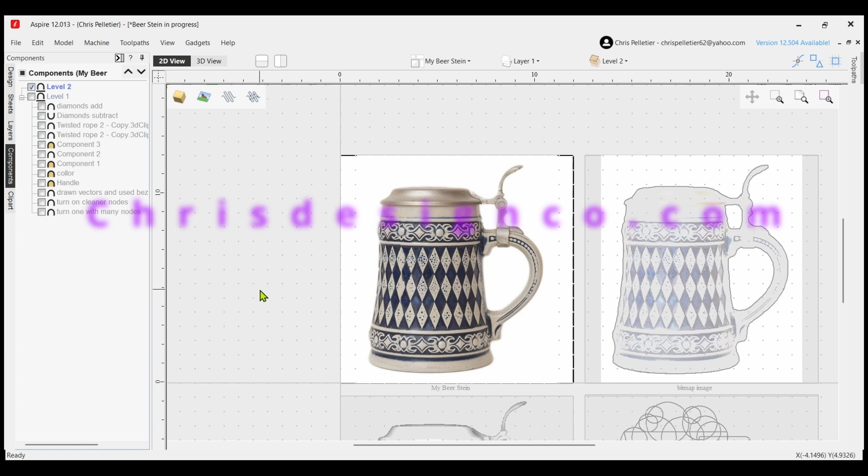I'm going to do another tutorial model, showing a couple different ways of making a model. So if you have a program that can take bitmaps and make good depth maps out of them, you can do this. You can go to Copilot, get AI maps, or go to a couple different free sites to get depth maps made out of your bitmaps.

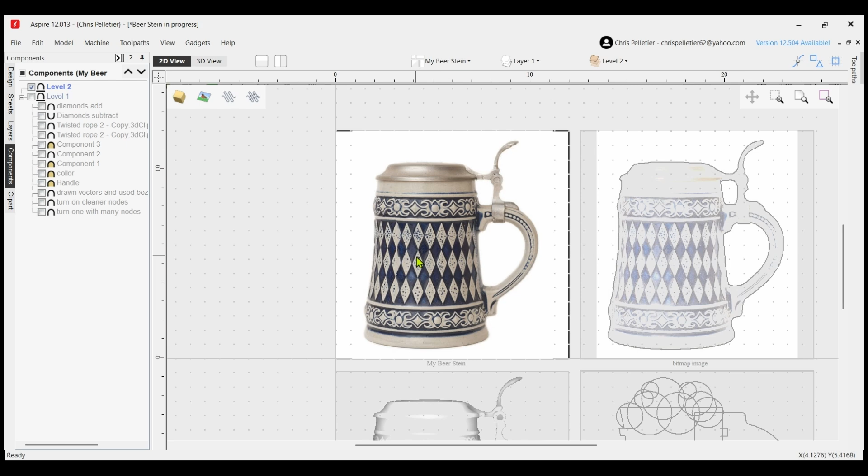So here's what I do. You take the image, I just got this off the internet, and what I'm going to do is a trace bitmap of this. So I'm going to go into trace bitmap, and I'm going to outline this whole thing.

I'm going to accept it and close, and turn the bitmap off. Now you can see you've got this vector. So I'm just going to get rid of some of this mess here.

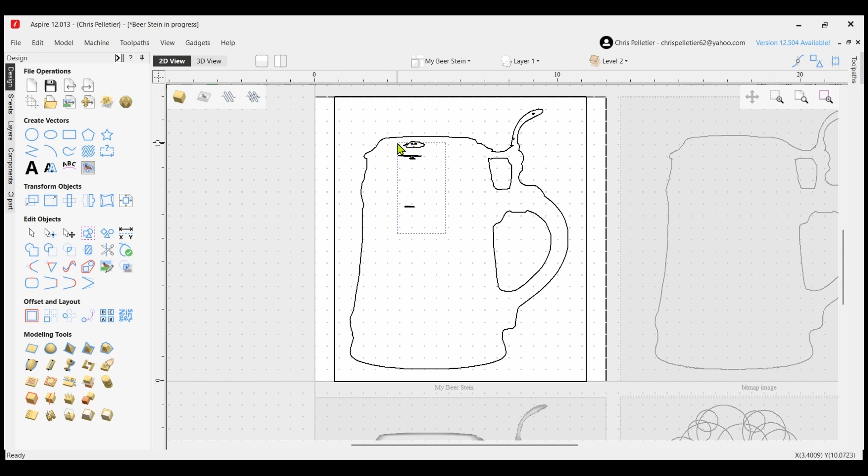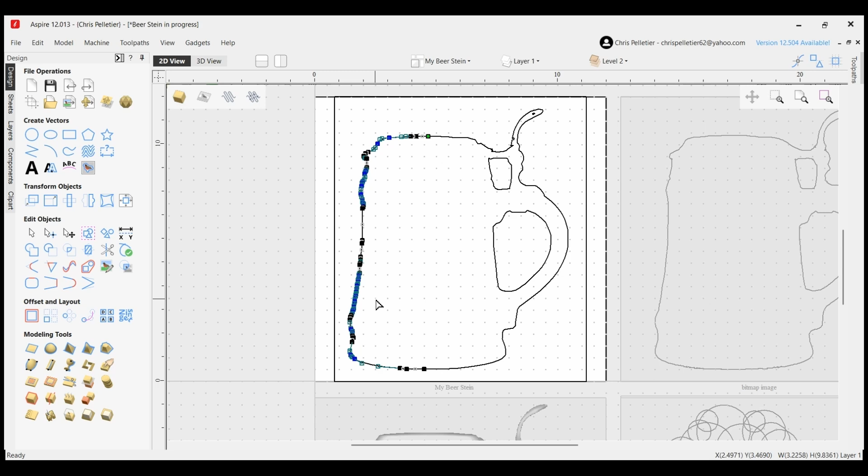Now what I'm going to do is a turn. So I'm going to go into node mode, and I'm going to cut this in half, because I don't want this part, I just want the body of the mug. So which means you're going to use this here. Now if you notice, there's lots of nodes here, lots of them.

Now I'm going to show you what happens when you don't really clean up nodes. So if you go in here and do a turn, you go into your spin and turn tool, take turn, make it merge, and apply it. And I scaled it to a height of 1 inch.

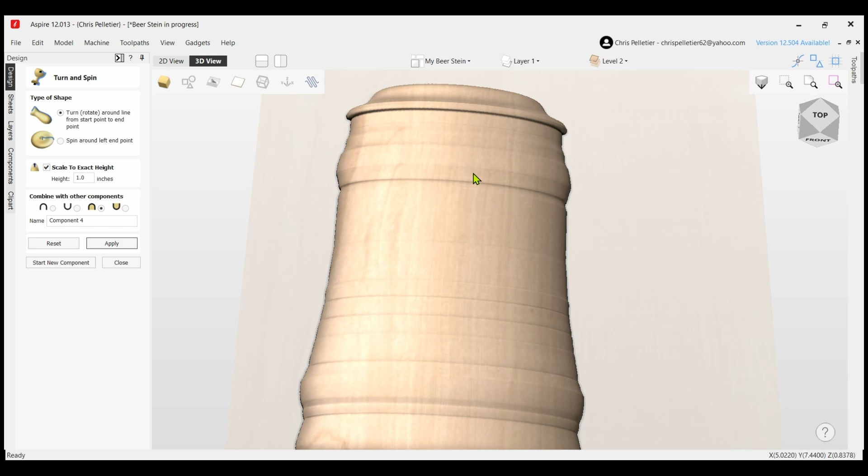So here's what we're going to see. I'm going to turn that off. Now if you look at it, it looks okay, but see all these lines in here, all these extra lines. I did not want this texture. It doesn't look, to me, it doesn't look real.

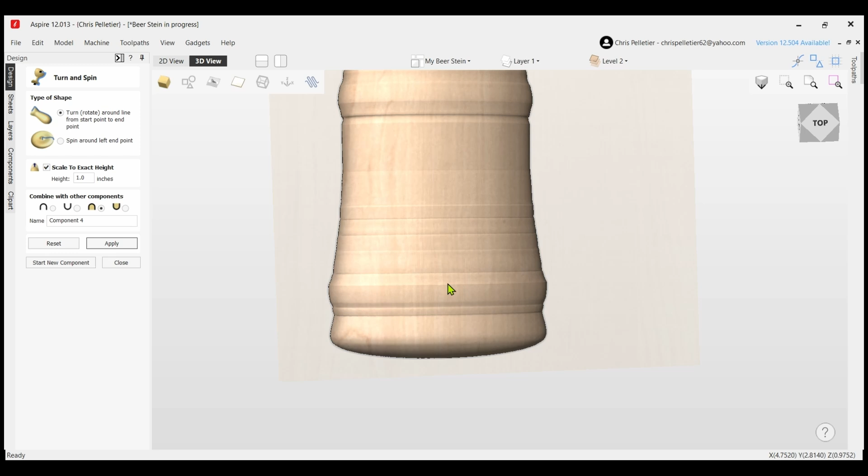And you also have this bottom of the lid of the stein, which is rounded. If you were to have a mug with a round bottom, you'd need a reason to drink - you'd just keep spilling your beer. So this isn't very accurate either.

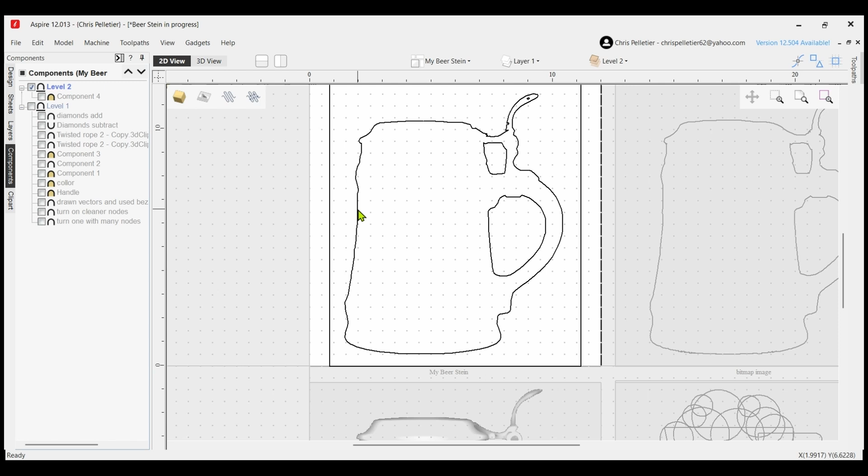So what I do is I don't do that. Even if you go into this and try to do smoothing with it, let's see what happens when I smoothen those nodes out. All right, better, not bad. So let's try that one.

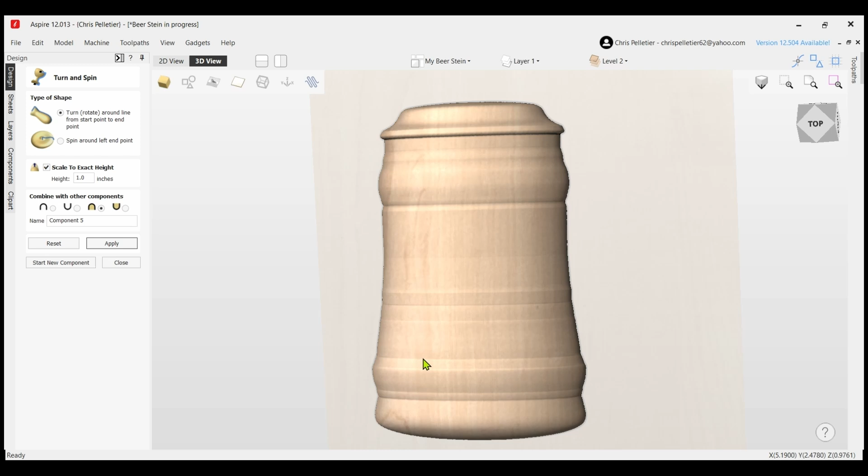Still get all this extra stuff, which is not clean. It doesn't look good to me. So we're not going to use that.

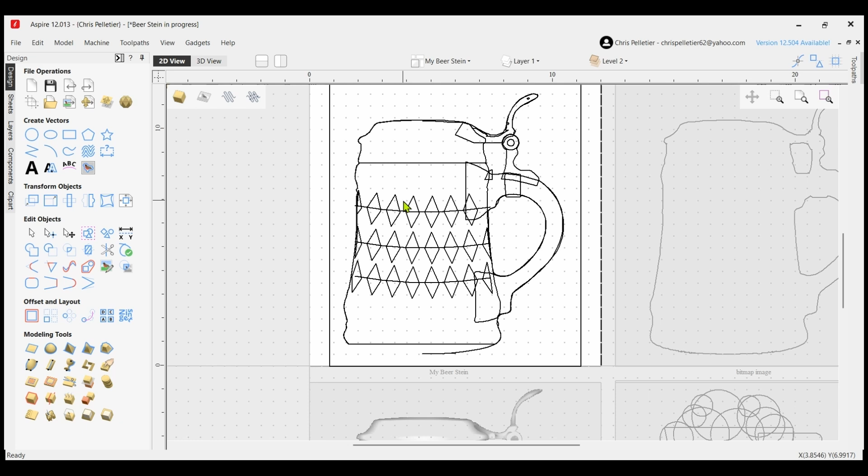So what I did is I removed this and drew my own vectors. I drew diamonds, which was on the model. When I drew the model, I drew a diamond, and then I took this tool here, which is create an arc, and I just followed those diamonds so it would kind of look like it's rounded. If it's straight, then it's going to look straight, and it doesn't look like it's turning. So that's what I do.

So I put 3 of them in here, and then I did array. I selected the diamonds, highlighted your vector, and went into copy along vectors. I did 8, align to curve, and create copies on a new layer. When I did that, it made all of these. I'm not going to do that now because I've already got them.

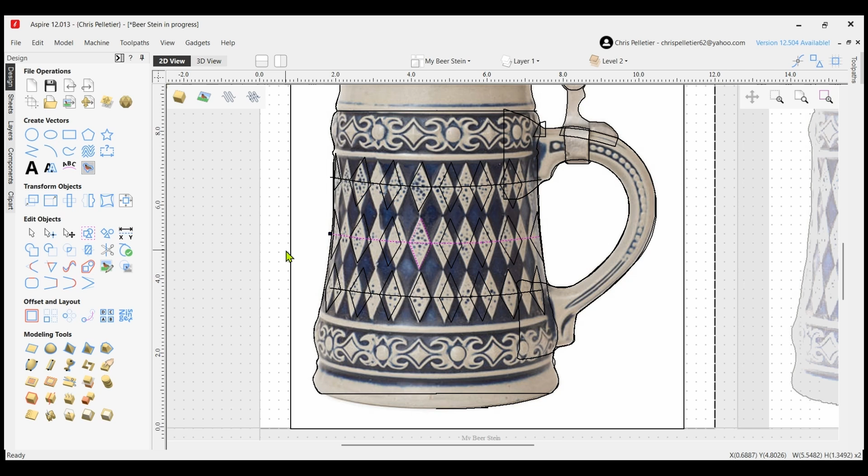So the other thing that I've done is I drew my own line. As you can see now, I made it straight rather than going around. And if you look at the nodes, I'm going to clean them up. Now, how many nodes do I have here? Got very, very few nodes. Very few.

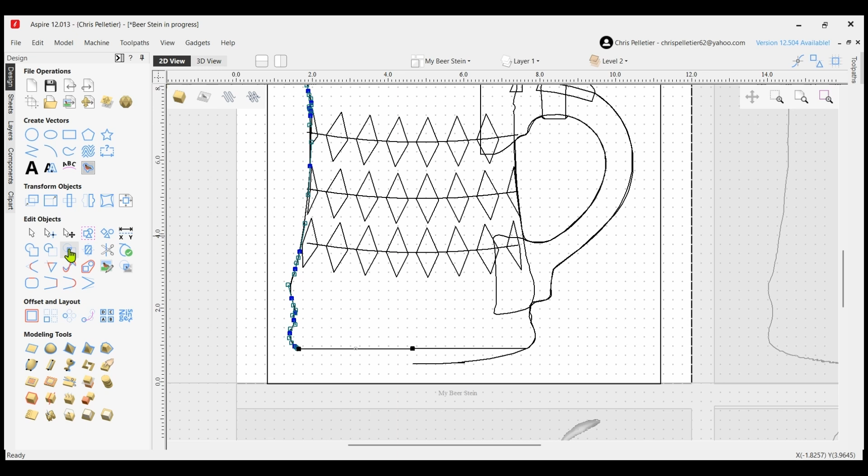Just so you can see them, here are the nodes now - a very small amount. So now I'm going to take that and do a turn. Now look at that, nice and clean.

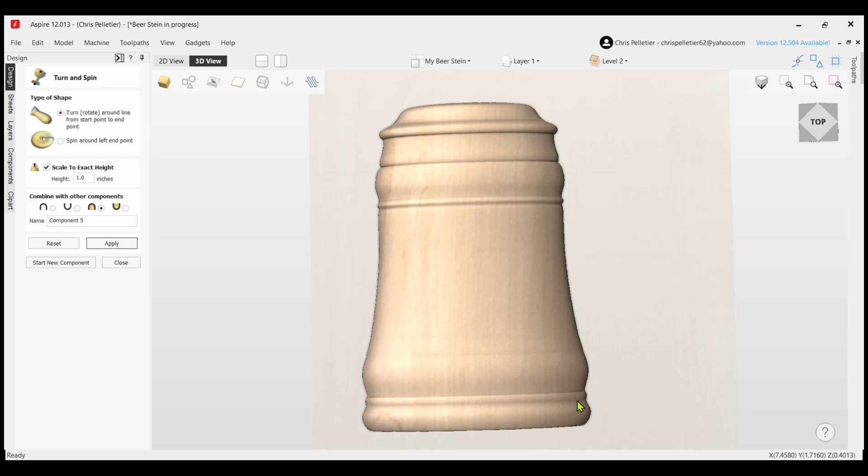I get the bevel that I wanted here. I get this little piece here, which looks like a bottom, nice and round, and if you notice, it's flat. Well, at least you can drink a couple more beers without spilling because it'll sit nice. You've got the top - this is starting to look like a beer stein. So we're good with that.

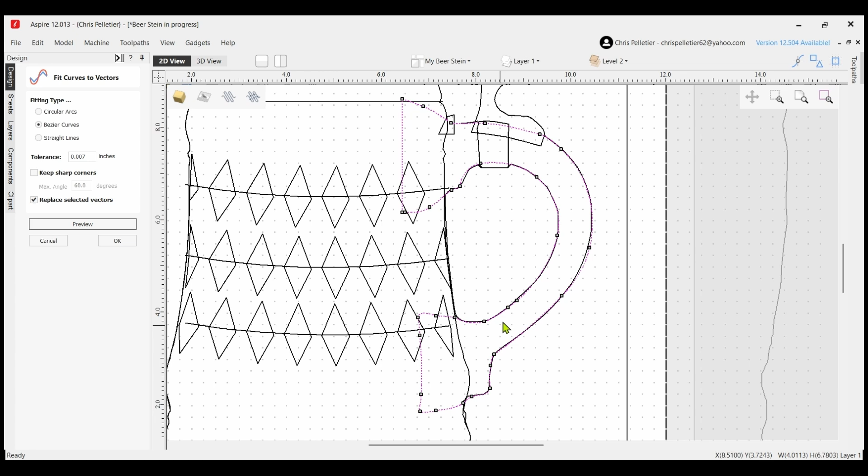So then what we need to do, I'm going to turn this off, go back to my 2D vectors, and now I built a handle. Again, I did the same thing - I built my own vectors, because if you go in and take a look at the nodes, they're nice and clean. Very few nodes.

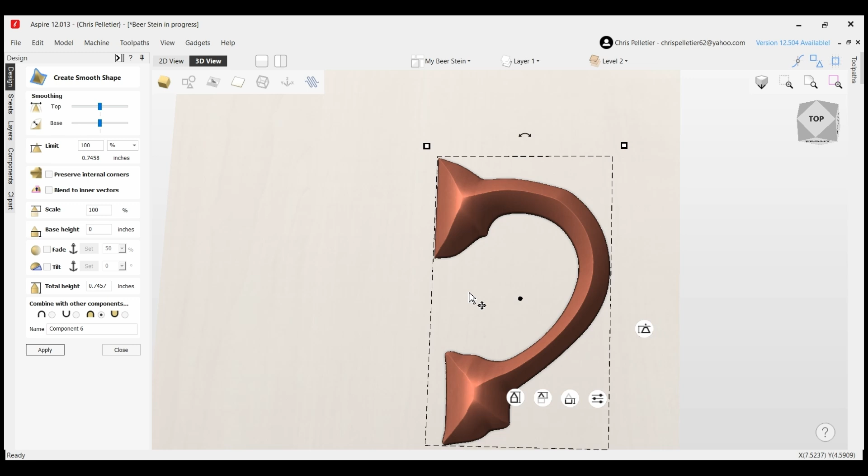So that's going to make a good model, a component. So what I did is I took that and used the create smooth shape components, and again I'm going to do a merge and it creates it. So now what I can do is you see it - I'm just going to shape it, flatten it out a bit, and make it look like it's a handle.

That way it's got a nice little angle. It looks pretty real to me. So that's good, so we're going to take that.

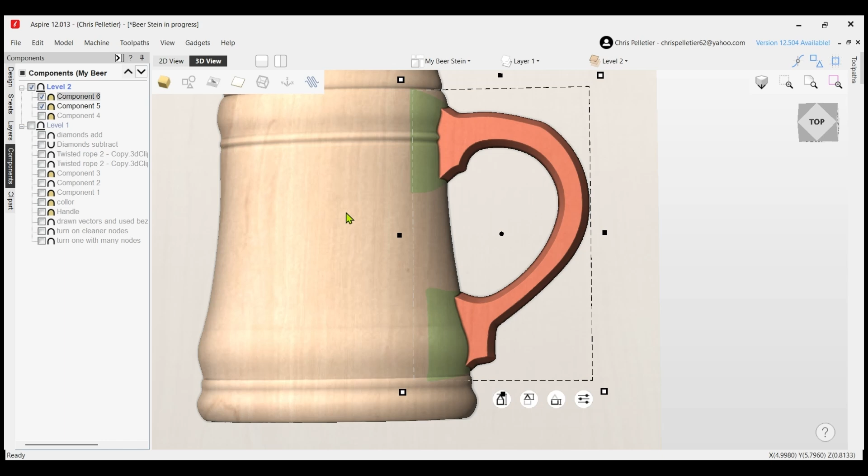So if I were to do that and then turn on the mug, here they are. Now remember, I put them both on merge, so now they're fitting nice and neat.

I'm just going to bring this up a little bit to make it look a little better, just a little bit. You can play it any way you want.

And here's your beer stein coming together nicely. Now you can design your model any way you want. Now I'm also going to take this, hold the Alt key down, and slide it in a little bit, and up.

So I like that right there. So now we have to make this latch system and everything.

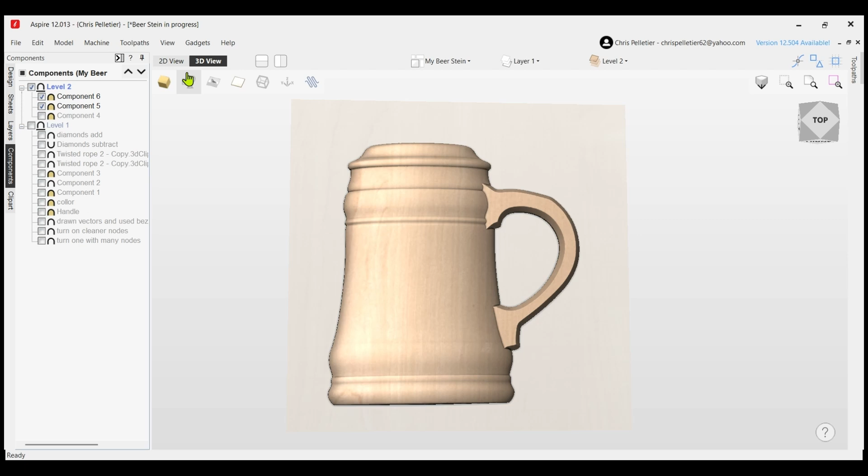So what we do with that is we're going to go back to our 2D view. I'm going to turn this off. Now I drew some latch pieces, and again, I drew my own vectors so they're nice and clean.

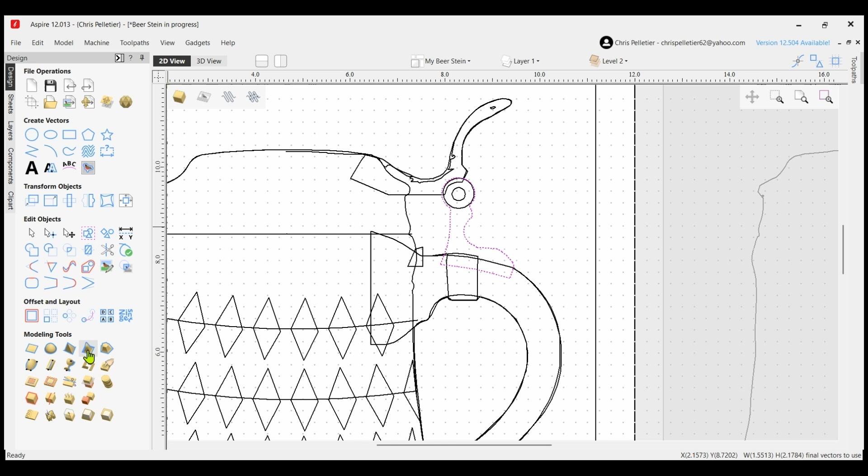So what I do here is I make this one, using the same tool, create smooth shape component. Also going to use merge, create that. Go to my 3D view, and I'm going to flatten it out a bit. Okay, that looks good for now.

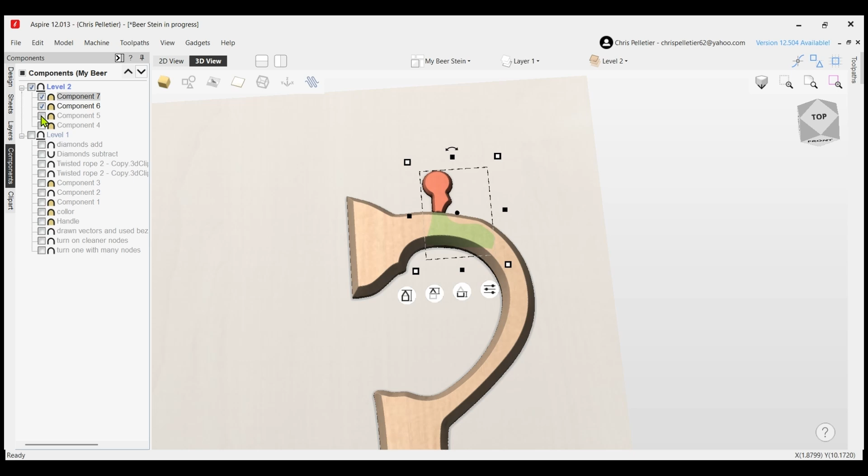Let's turn on my mug, or my handle, and my mug. So since I moved things around, it's not going to sit right, but all I need to do...

Is get it in there, have it sit there, bring it up a little bit.

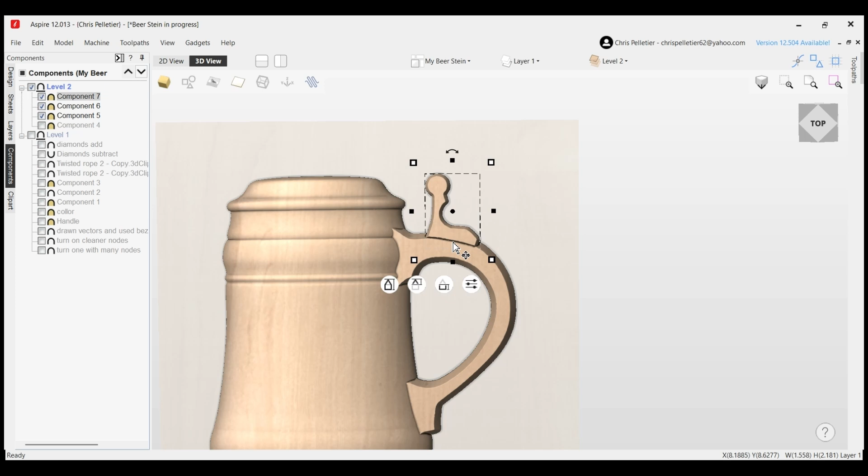I'm going to bring it down. I don't want it all the way into it, so we're going to keep it like right here.

Okay, so now we have that part. Now we have to do the circle, it's a little nut of some sort, so we're going to draw that.

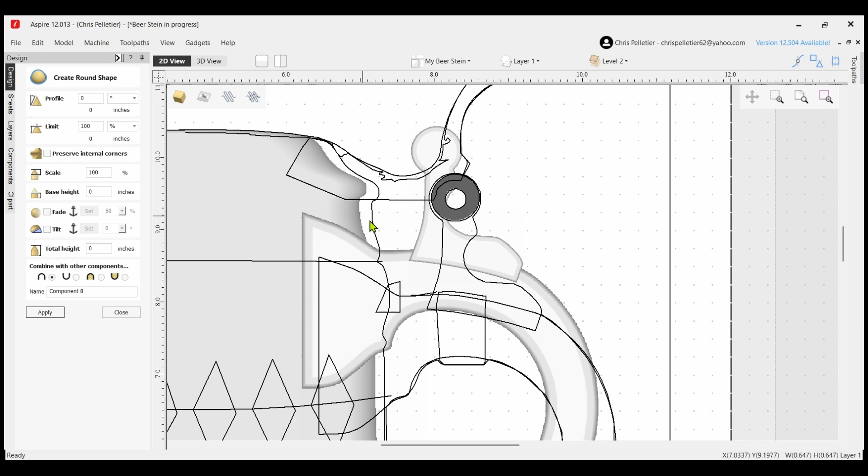And what I'll do is I'll use the round one, make it round looking. Now this one we can do add because it's going to sit on top. So come here, and I'm going to bring it up to about 90 here. I'm going to flatten her out just a little bit, give it a little bit of flatness.

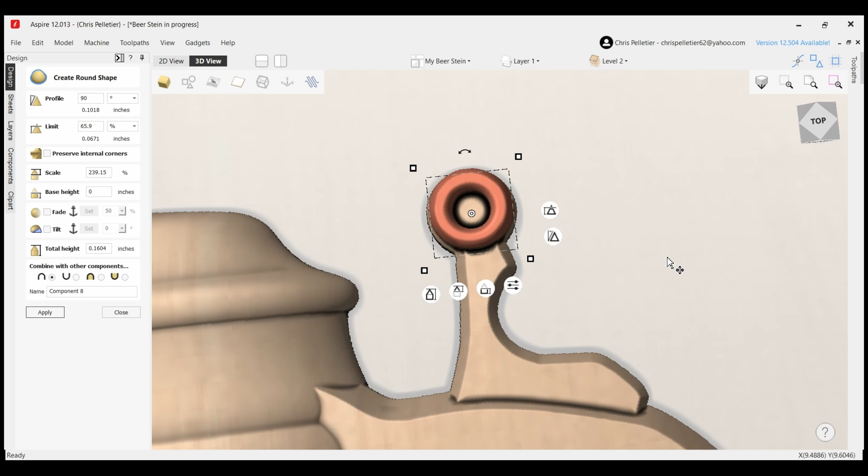And I'm going to bring it up, and now I'm going to get it and sit it right on top there. So now I've got this little knob here, which looks good.

Looks like the hinge. Now what we need to do is go make this piece here. And I'm going to do the same thing, but this is going to be merge.

But I'm not going to use circle, I'm going to use this piece right here, and we're going to use merge, select the vector, create.

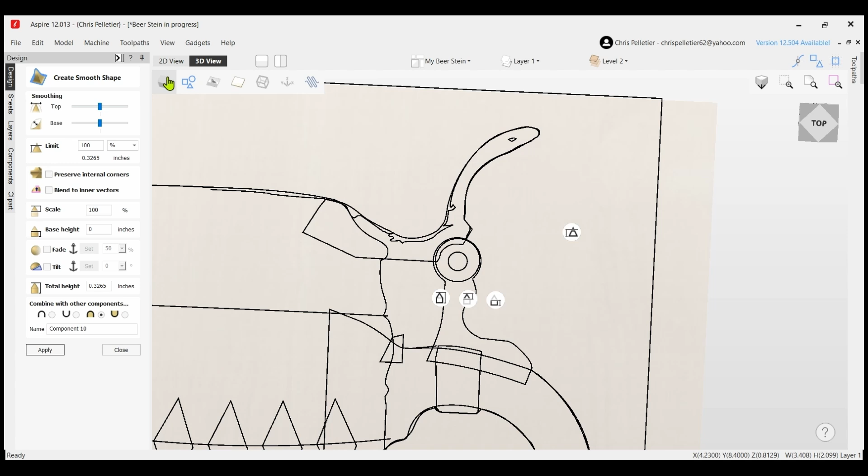Turn it back on, turn this off. I'm just going to bring it up for now so I can see it, and I'm going to move it.

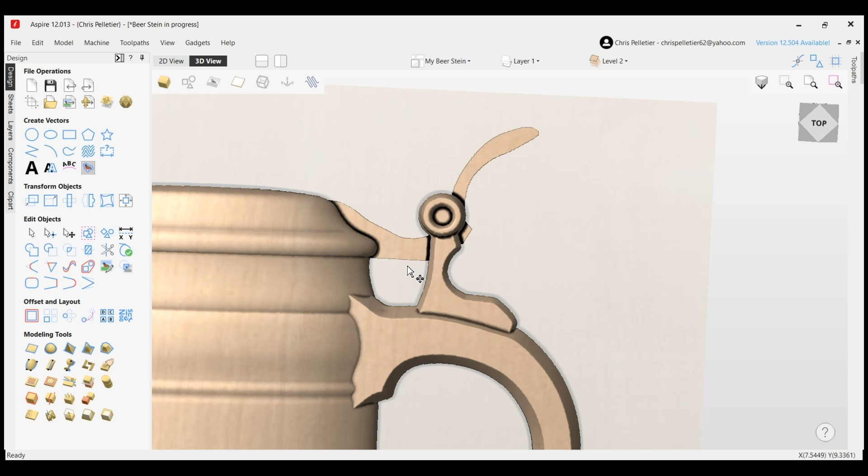I don't know what happened here. What happened? Let's delete that. Delete that. Start over again, and we'll build a new one.

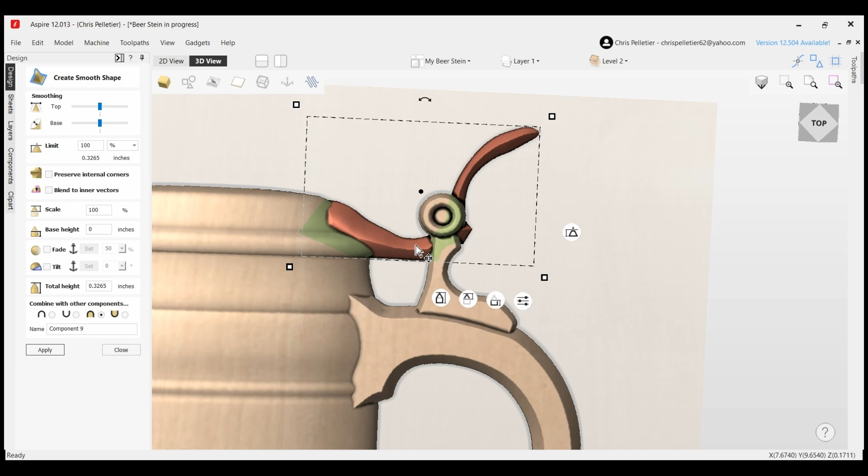Okay, so this sits kind of on top of that. We need to flatten her out. There we go, now we can just bring it up a little bit more.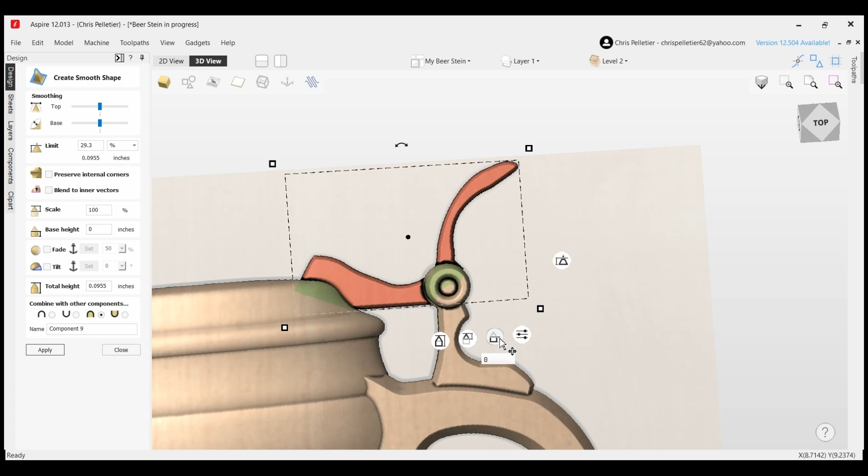And now you can see it looks like a nice latch piece, so there's a nice clean model, and that's how I build it.

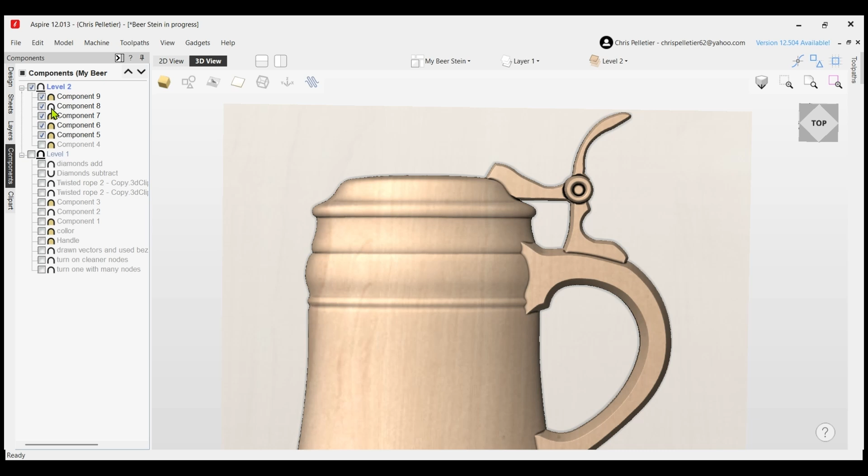So I'm going to show you what mine looks like after I spent a little time on it. So I added this piece here, I added these, and I added a little twist, which I will do another video on how you do twisting.

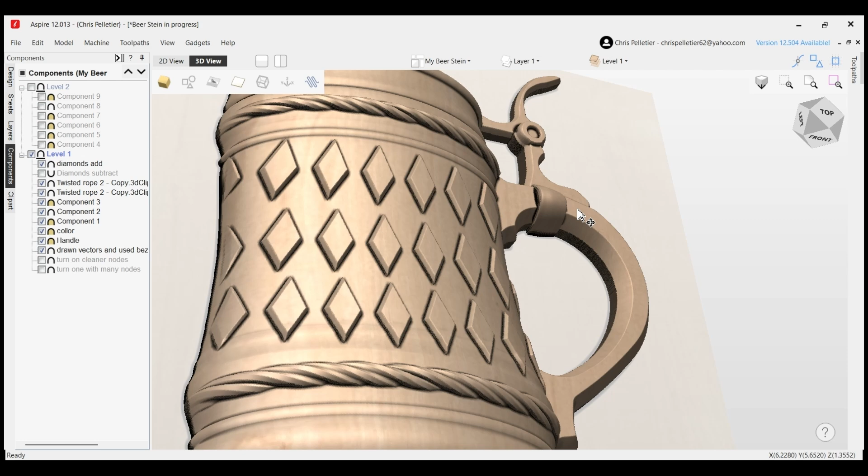And I also added the diamonds. Now you can also do the diamonds inset, depending on how you like it. That would look good carved, stained, look good, or add, so they're coming out. So that's how I did this.

So if you look at this one versus this one, totally different. But again, this is not what I like here. I don't really like this handle.

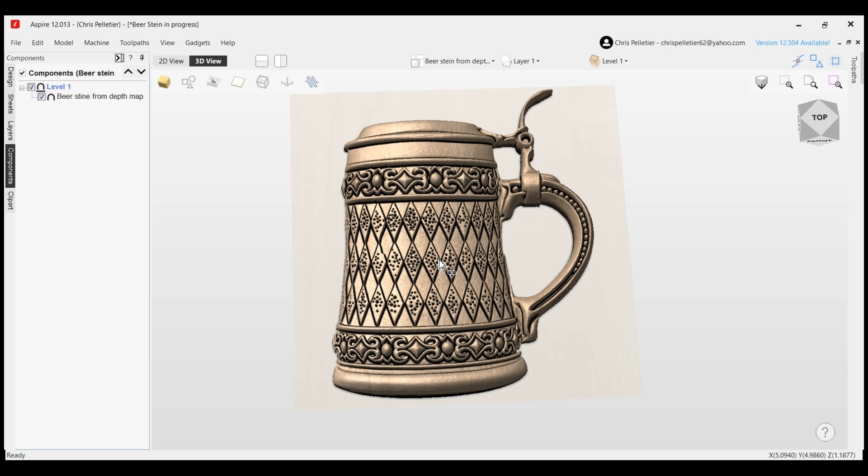I don't like the holes in the diamonds. But again, some people would, you might. But again, see, now look, it's got a little texture because I had to bring it up.

Now you can, again, this is how it comes in, nice and flat. So you bring it up however you would like. But as you notice, as I'm bringing things up, not everything you want to be exaggerated exaggerates.

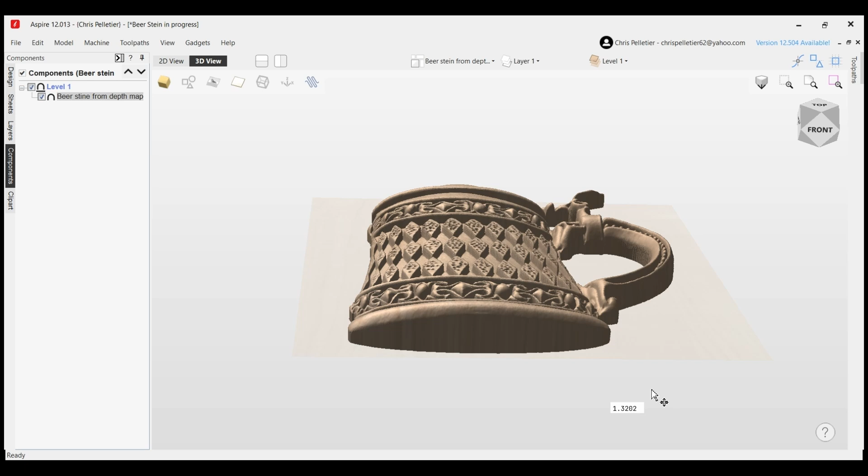So like this piece here, and even this handle, it starts to get very sharp. And then if you try to carve it, it's very deep inside here. That might not carve very well. You might like it, but it would take a lot longer to carve.